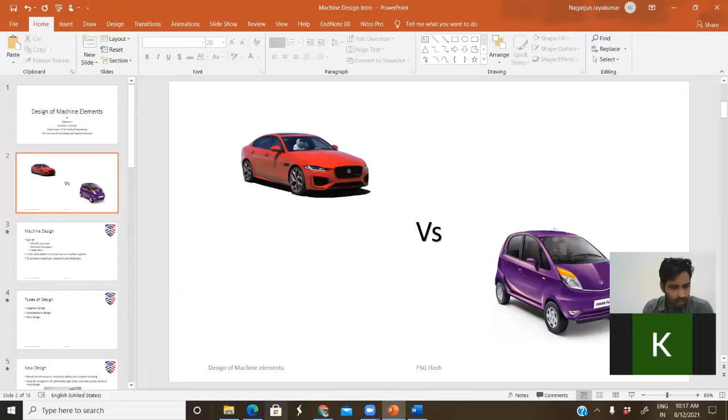Let us make it. Let me ask you, of these two, which is the better design?

What is there towards the left of you? Can you see that? What car is that? Jaguar. Yeah, it is a Jaguar car. And what are you seeing towards your right? Nano, sir. Yeah, it's a Tata Nano.

Yes, it's a very carefully thought answer. Very good. Who said that? Sir, Vignesh. Vignesh. Very good. Any other answers?

Or rather, I should say, any other points to be added? Any other thoughtful? Any other thoughts?

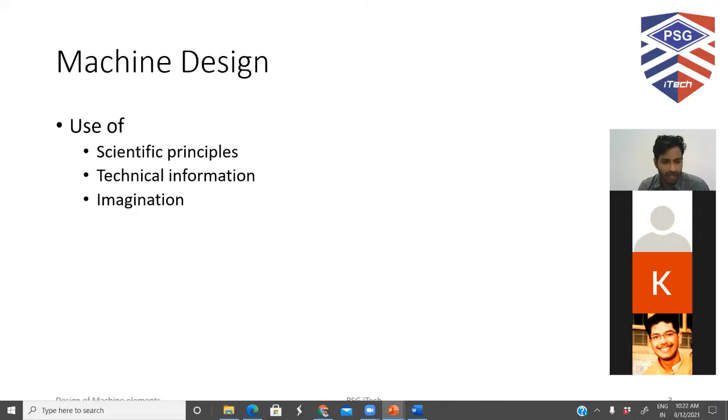You should apply a lot of scientific principles to your design. That scientific principles will come from strength of materials and engineering mechanics. So the scientific principles that you have learned, you should apply here, in the description of a machine or machine system to perform to the maximum economy and efficiency. So these are the driven points behind machine design.

So these are some of the common questions. What is machine design? It uses scientific principles and it uses technical information. Technical information can be many things. What are the materials available? What are the manufacturing processes? These are some of the technical information that you should understand.

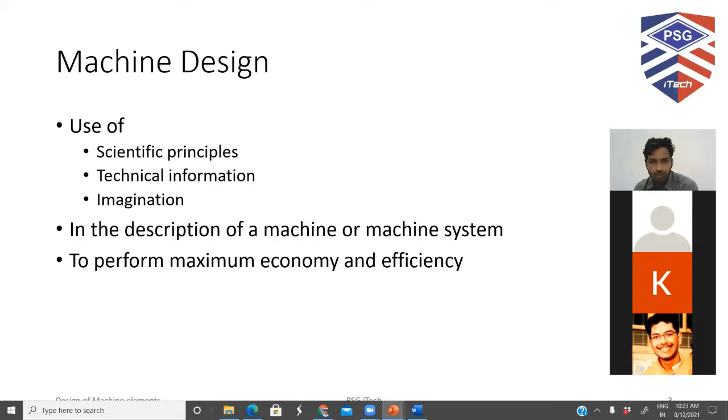You have to apply your imagination in describing a machine or a machine system to perform to the maximum efficiency and maximum economy. You should optimize the cost. So these are some of the implications of machine design.

So there are types of designs. One is adaptive design, development design, and new design. New design is something we can also call innovative design.

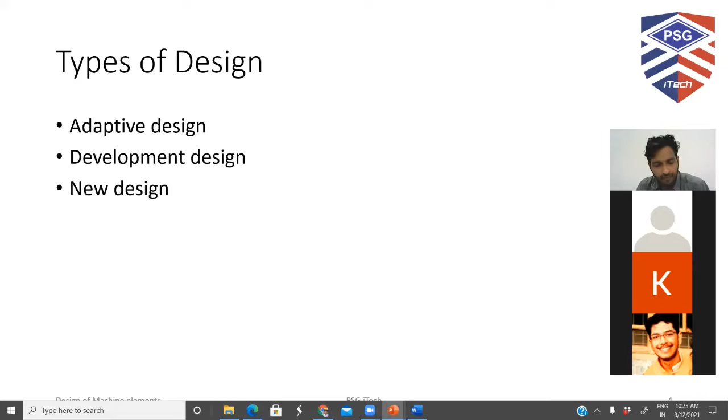So do you see what is here? This is some example for innovative design, new design. What you are seeing in front of you, can you recognize that? Do you guys recognize this? What is this?

The 3D printing is not... Perfect, so this is the first 3D printer that was ever made. Do you know when it was made? Any idea?

The concept was generalized in the 1980s, and I think it came to the market in the 1990s. The first company that marketed the 3D printer was Stratasys. Stratasys first got into the market in the 1990s, but only in 2000 and 2001 did this printer get popularized.

It's because of patent implications. During the 1990s and 2000, that 10 year period in between, the patent was intact. Only Stratasys could make use of the patent, and after 2000 the patent got expired. So only when the patent expired did other companies come into the field. There are now around thousands of companies into the 3D printing department.

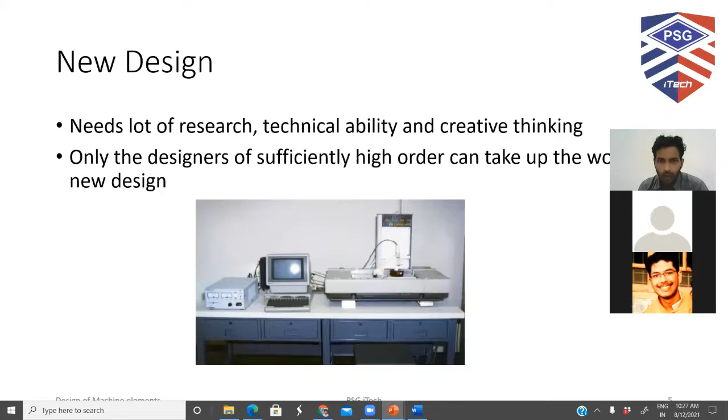So as I said, we have to catch up a lot in doing innovative designs. But we are in development designs, so it needs considerable training, and it has to modify an existing design into a new idea by adopting new material or a different method to manufacture.

3D printing I can take as a best example, because the first 3D printer makes use of resin by use of UV lights. When UV light passes through, the material will get solidified and you will be getting the required object.

By now you should be well aware of what 3D printing is. 3D printing is layer by layer manufacture as compared to conventional machining. In conventional machining, there will be a mass of raw material where you will be doing the cutting and machining process. You will be removing material to get the required shape, whereas in 3D printing you will be adding material layer by layer. That is the concept behind these two.

So initially it made use of resins, and now it makes use of filaments, metal powders, and also ceramics. The materials are endless now—you can use any type of material for making a 3D printed substance.

This is what we call development design. Initially it was just made for resin, now it has also been made for metals and for ceramics. Likewise the materials are endless. These are called development design.

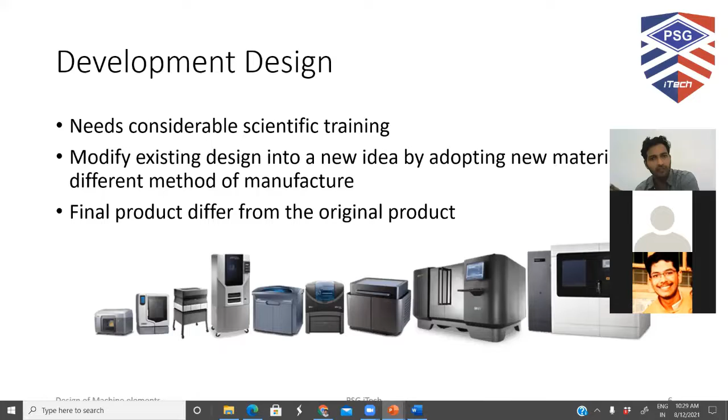So the final product should differ from the original product. Of course it differs, because you cannot use a metal powder similar to a polymer resin, and you cannot use a ceramic powder similar to a metallic powder. Each material needs a specific temperature and a specific manufacturing process, so it will differ from the original product. These are what we call development design.

There is something called adaptive design. This is where we are best at. As Indian engineers, what we do is take the existing design and adapt it for our Indian conditions. For example, in the US, the car engine has to be made for minus 20 degrees Celsius.

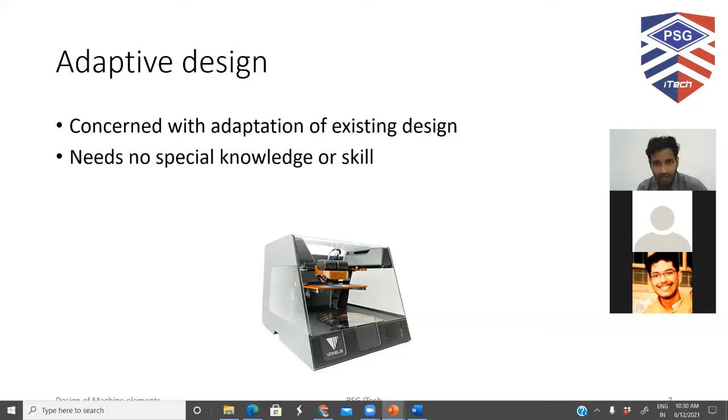This is what we are doing in India. It needs no special knowledge or skill, since we are just doing some minor changes. It can be done with ordinary technical training. It is not that difficult, and it forms the least difficult design.

Adaptive design is very simple, development design is much more complicated, and innovative design is very complicated. This adaptive design example is manufactured by a company called Voxelab, which is a kind of startup company. There are many startup companies these days doing 3D printing manufacturing. These companies came from nowhere - after the patent got elapsed, so many startup companies took up 3D printing manufacturing.

So this needs no technical training, no special knowledge or skill, just adapting the concept behind the existing design. This is very simple - it needs minor modification to the existing design of the product.

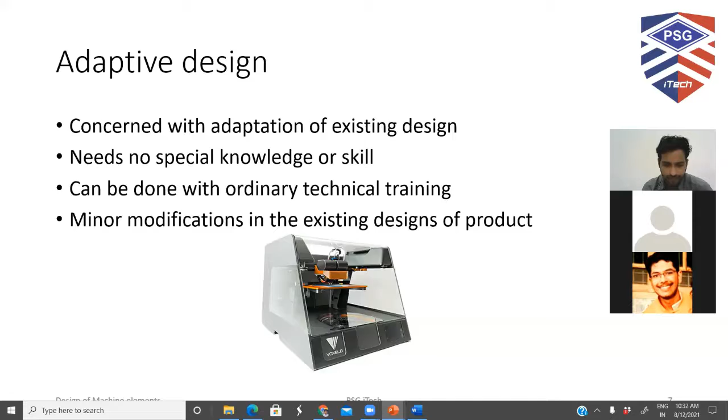There are other designs as well, classified in general into three: innovative design, development design, and adaptive design. Those are design developments. In other ways we can classify the designs - these are rational design. Rational design is a thoughtful design - you should think to make a particular design, that's what we call rational design.

Empirical design - do you have any idea about empirical design? Any examples? Empirical design is just following up the procedure. You need not apply concepts, all you need to do is follow the procedures. Any idea for empirical design? You can explain these things actually.

You can take the example of gears. The gear concept was made many hundred years ago, and now you know how well the design has been made. These are just following up the footsteps of the previous designs. There are standard procedures for making gears, with standard instructions and procedures well given in the design data book.

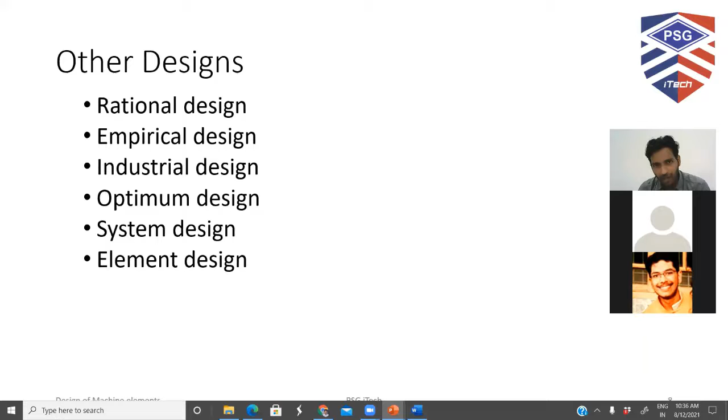And what is system design? Normally, as we are seeing in this particular subject, you will not be designing a particular element alone. An element is part of a system, right? So designing a complete system is what they call system design. So a collective design is a system design.

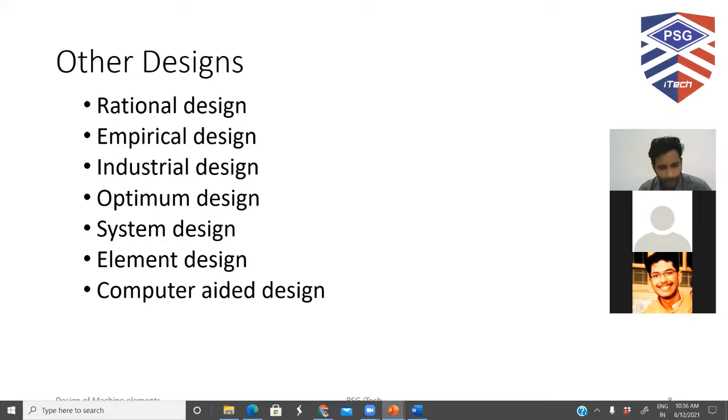And finally the element design. These are sub-parts of the system design. You have to design the individual components to make a part of the system. So these are some of the design topics. Computer-aided design: making use of a computer to model or design something is what we call computer-aided design. These are the other design classifications.

The next thing is the procedure of machine design. If we have to design a particular machine, for example a lathe, a car, or even a bicycle, how can we make a design procedure out of that? Say you are going to start a startup, for say cycle production, just to produce bicycles. How will you arrive at the design procedure? Where will you start? Where will you start the design?

Sir, frame of the cycle. Frame of the cycle. Okay, I should say it is a third or fourth step. Before that, you should follow a few protocols. What are those? Sir, designing according to our requirements. Okay, that's a very good answer. That forms the second step. So we have to arrive at our requirements, right? But what should we do to arrive at the requirements? Sir, the basic requirements, the previously existing types of bicycles, sir.

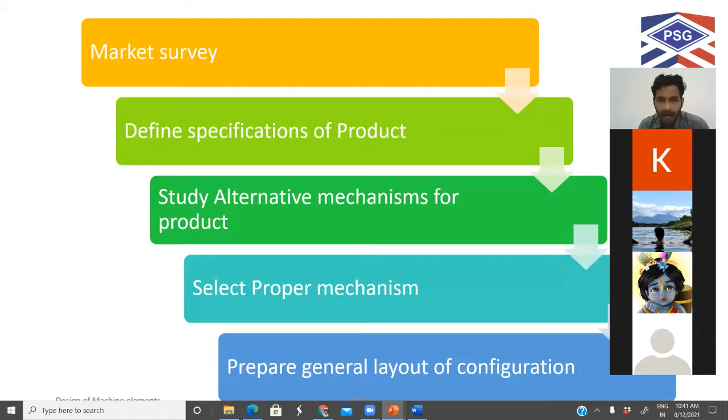After studying the mechanism, you should form the general layout. What are the supportive things for the particular mechanism that we have chosen? For example, if we have chosen the geared bicycle, how well are we going to transmit the force to the pedals, what chain are we going to use, how many links should there be, and what precautions do we take to fold the cycle? These are some of the mechanism thinking that you have to go through.

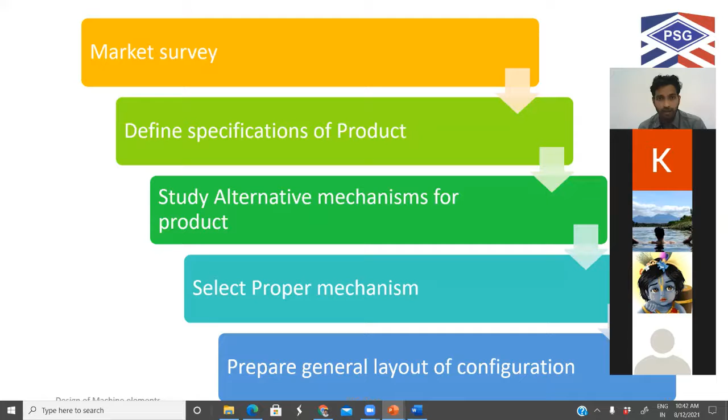After going through those, we have to form the general layout. How can we fold it? What is the layout that we need? These are the plannings that take place before doing the machine design. And the very important thing is we have to choose the joining methods. Are we going to do temporary joints or permanent joints? Those are the questions you have to answer while doing the machine design.

Do you have any idea about that? What are temporary joints and what are permanent joints?

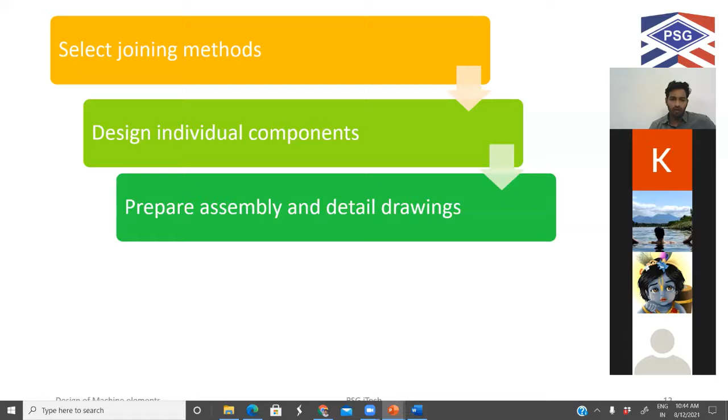After designing individual components, we have to prepare assembly and detail drawings. Here is where the CAD part comes in. We have to do the drawings. You would already have studied the SolidWorks software, so you should make use of the software for detailed drawings and assembly.

Finally, we have to do the prototype. Which is the best manufacturing process we have seen just now for making the prototype? 3D. Yes, for testing the prototype you can make use of additive manufacturing or 3D printing. After testing the prototype, if the results are not satisfactory or you want improvements, we can modify our drawings based on the performance seen in the prototype.

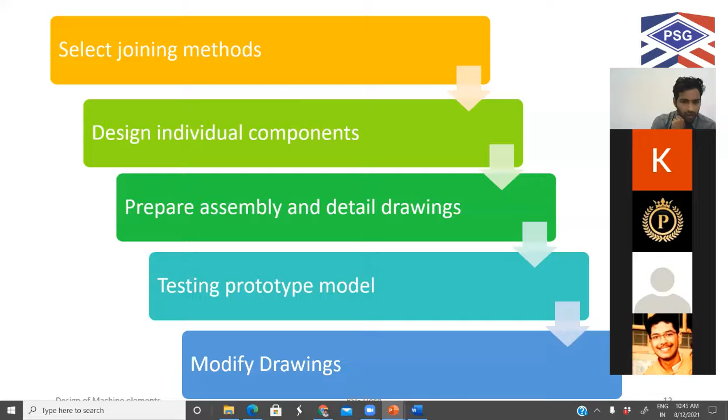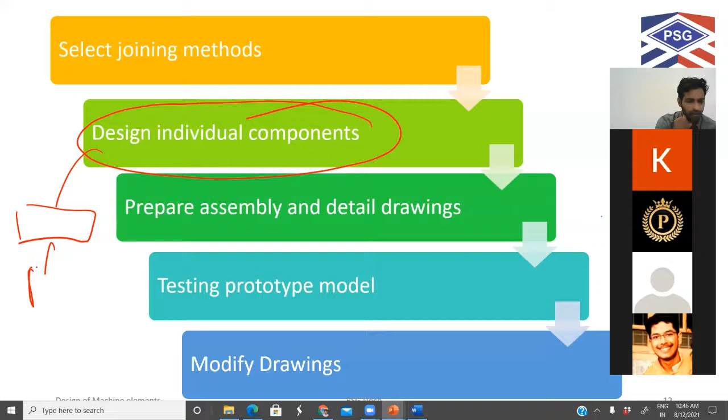So these are the design procedures we carry through while designing a system. In the next class we will see the design of individual components. This forms a separate procedure, which we can see in the next class.